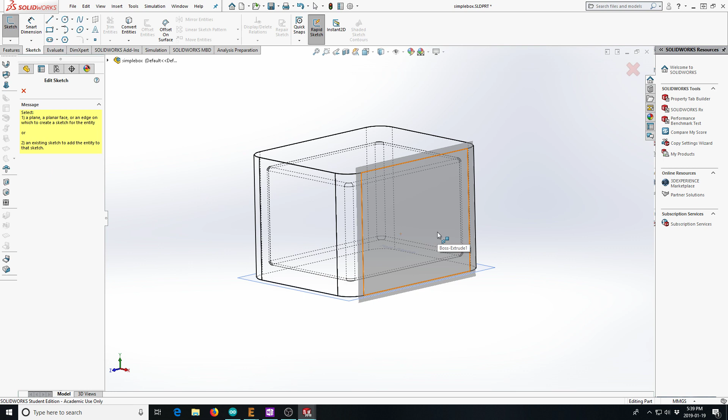So what that means is, first of all, I need to draw a curve. And I'm going to start with a new sketch. I'm going to sketch on that face. So I'm sketching on the side. And I'm going to use a spline tool. And just let me look from the side that I'm sketching on. Spline tool, which means I'm going to draw a curve. And it's not even a very regular curve.

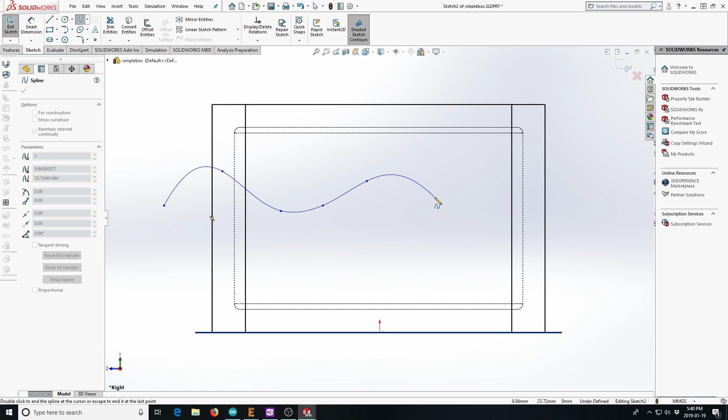There. You can finish it up and then you can move these points around and that changes the shape of it. Whenever you're making a curve, the more points you put in, essentially the more trouble you give yourself in making the curve what's called fair and looking fairly decent. So I just caution you that when you do use a spline tool, keep it as simple as you need it to be to get the features you want.

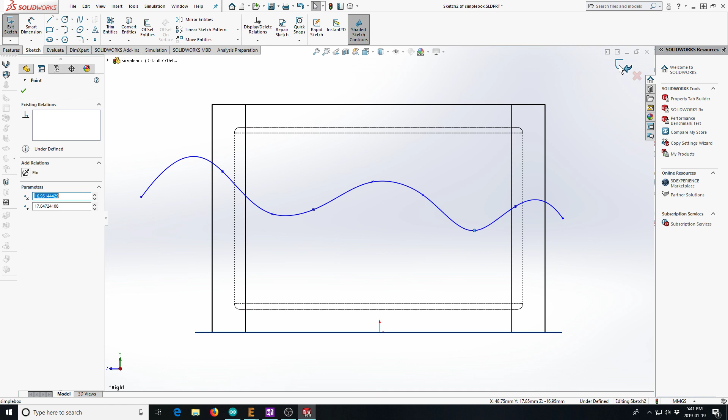In my case, I don't really care. I made this thing that's curvy. And I want to do that because I'd like to make the box fit together only one way. So I'm going to accept that sketch. I've got that now. Now I'm going up to, trying to remember where it is, insert surfaces. I'm going to extrude that curve to make a surface. And I'd already selected the curve, so was happy with that.

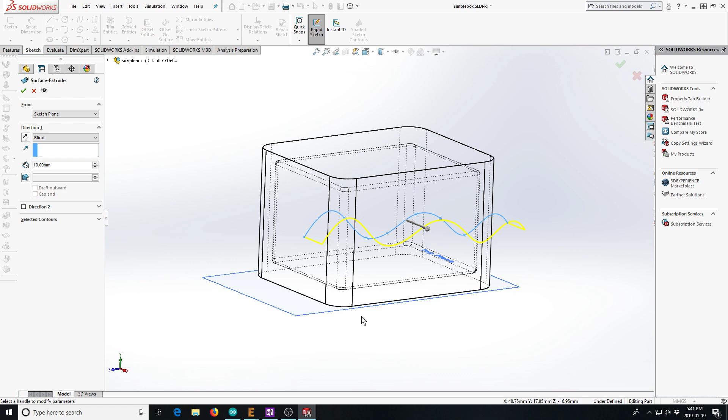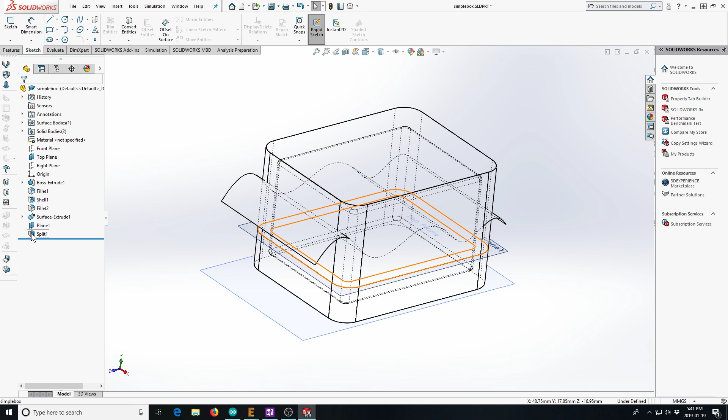And right now it's extruding that way. I want to go the opposite way, and I'm going to make that go through everything. There. So I've created this curvy surface. Now, if I unroll my split, I'm going to go back and revise this, but I'm not going to use that plane anymore. I'm going to use this new surface I've created, and I'm cutting the bodies. There. And so now it's already simply edited what I've already done.

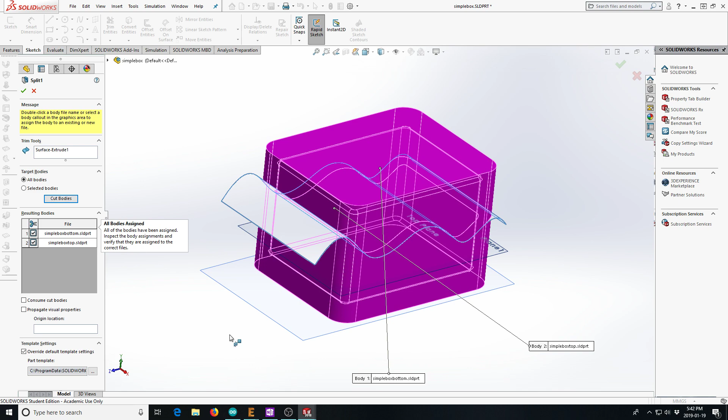I'm going to get some errors with it, I'm sure. And you can just see what each body is by highlighting it or not highlighting it. There, done. So now I've gone through with very little change. I didn't even get rid of that plane that I created. And instead of splitting it on that kind of boring plane, I have now made this part that's split apart on this curvy surface.

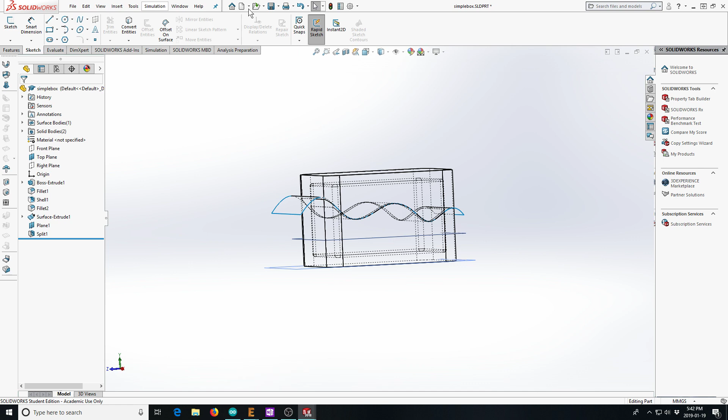So let's go and see what those parts look like. I'm going to go ahead and open those files, simple box top. Now when I open it up, it's going to give me a bunch of errors. And the reason is because I based these cuts and things on there being a planar surface on the top, and that's just not the case anymore. So I'm going to have to just roll back a couple of these things, basically all of these things. I think I'm just going to delete those.

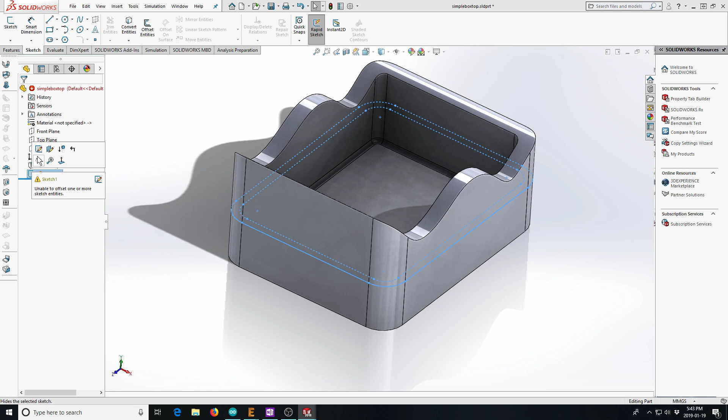There. So when I delete the feature that everything else was built on, it deletes everything up to that point. Now, it saved the sketch, which was good, and the sketch that it saved has an error on it, so it's got this alert, and I'm just going to go and see what it doesn't like about the sketch. And you can see that the thing it doesn't like is highlighted in brown here. It always shows you that, or in my case, I've set it up to be brown.

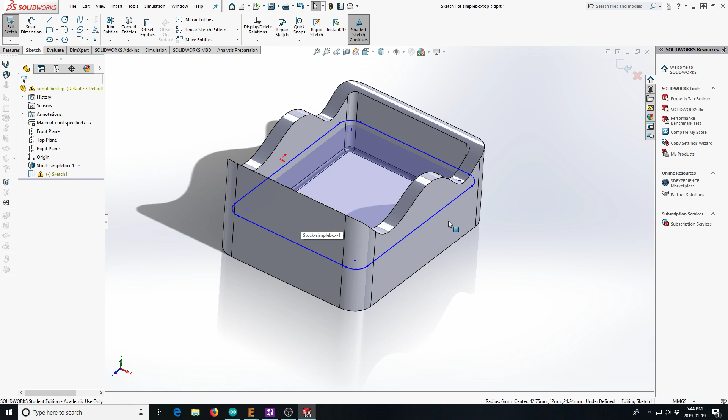And so that part, and if I highlight, it says, ooh, that edge that I tried to copy doesn't really exist. So I'm going to delete that. I'm going to delete that, that, that, and eventually I deleted everything that I could find that was a problem, and sometimes it's still really finicky.

So I'm going to go back, and I'm just going to start from scratch with a different sketch. Just delete the whole darn thing, because there wasn't much to that sketch anyway. And I'm going to start a new sketch. I still want to do the same thing. I still want to make my part with a cutaway so that the box top and bottom will fit together.

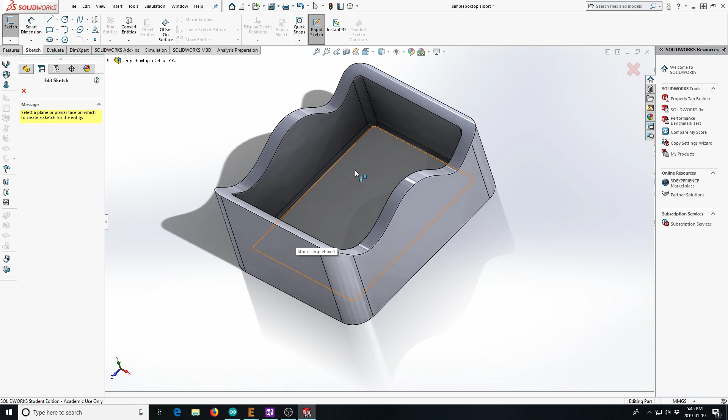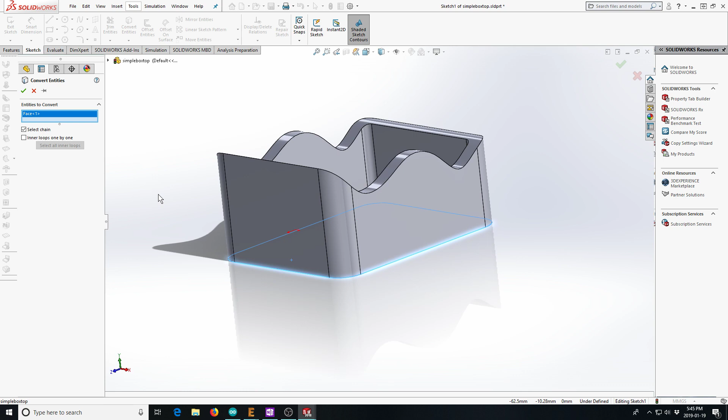Instead of picking a flat plane that was up here, I'm going to pick this inside plane to sketch from. Actually, no, I think to make my numbers consistent, I'm going to pick this bottom plane. And I'm going to do the same deal. I'm going to do the convert entities here, boom. And now it's happy with that.

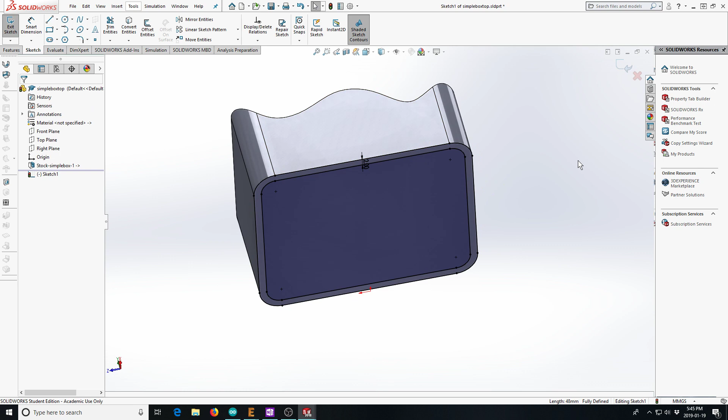And I'm going to do the offset entities. I don't want 10 millimeters though, I want 2 millimeters. It's gone the wrong way, so reverse, like that, boom. So now I've got a sketch kind of like where I had before, but this time it doesn't have an error in it. And I'm going to use this to cut away the outside of my part. Actually, no, sorry. I want to cut away the inside of the part.

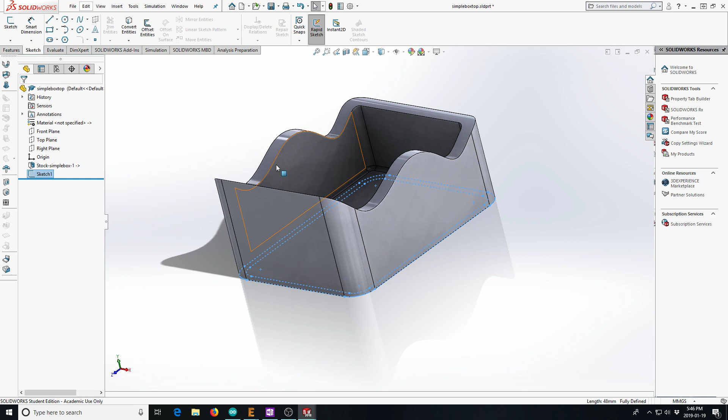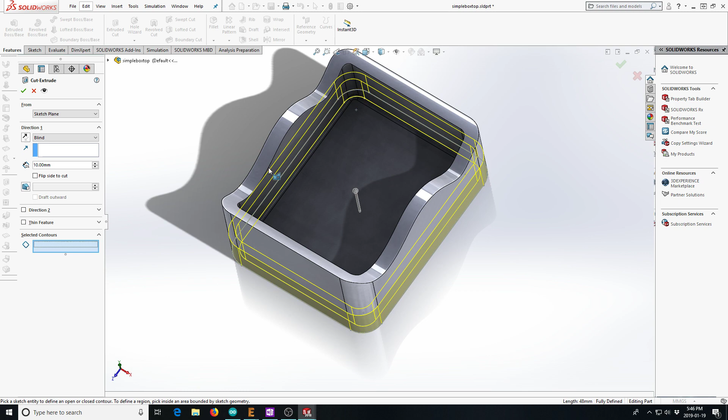So I'm going to go to my features, extruded cut, and I don't want to pick this in-between bit, so I'm not going to select that. I'm going to select this, trying to get it there. I want to pick that region. So I just selected the closed region on the inside of this as the cutaway.

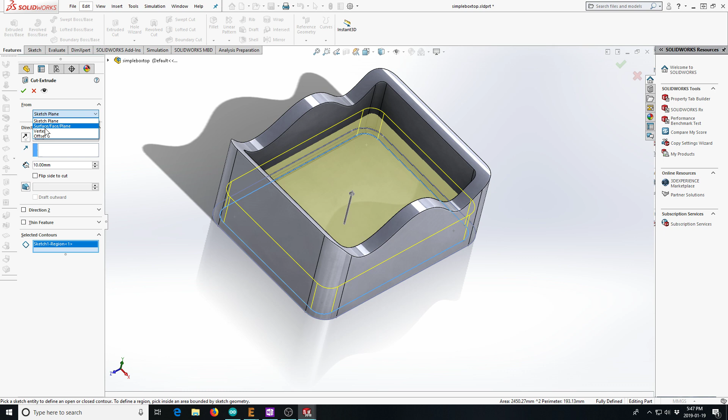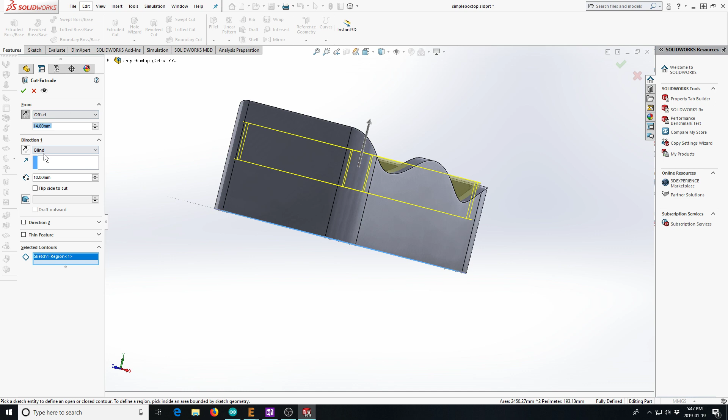And I'm not going to start from the sketch plane. I'm going to start offset from the sketch plane. Wrong way. That's too much. Maybe I'm going to select 14. Like so. So now I'm cutting on the inside of the part, and I'm going to cut through all. There. So now I've got this inside bit where I've cut it away.

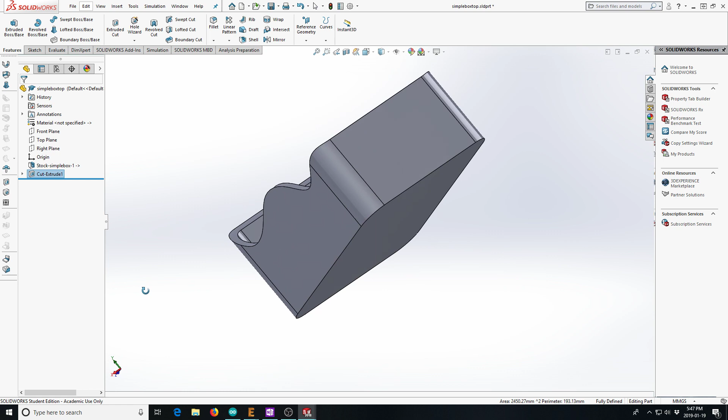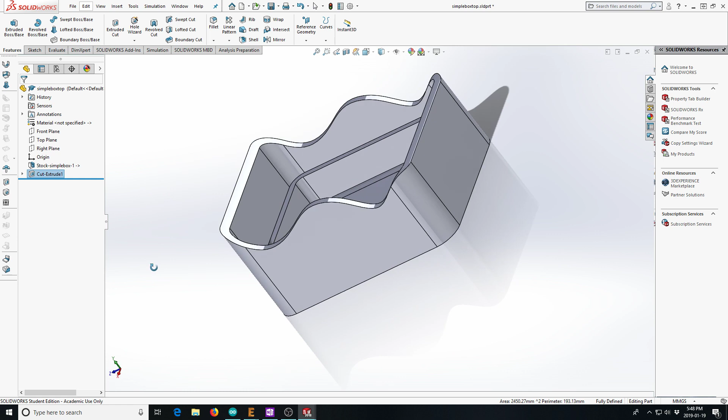And the same as we've done before, you can go in and do the mating part on the matching part, and then you'll have this box that will have this wavy-davy outside thing. So all you'll have to do is do the inverse of what I just did, do the inside part and extrude down from it on the other, so that you've got a mating piece in there, and then you'll have a box that will be kind of funky like this and fit together. So that's for those of you who wanted to try something a bit more sophisticated.